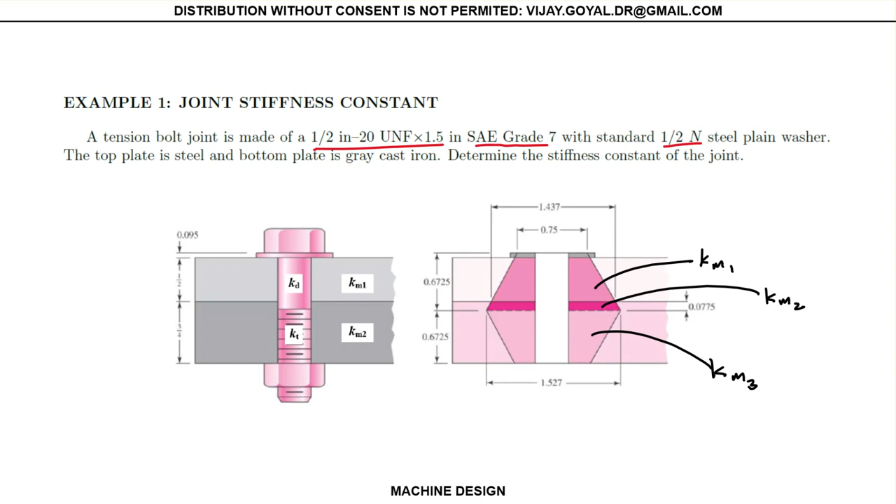With that said, let's move on to find the material properties. First, this is steel, and if you go to table A5, you can see carbon steel is given as 30 MSI, that's 30 times 10 to the 6 PSI. The gray cast iron is 14.5 MSI, so that's 14.5 times 10 to the 6 PSI. So these materials are given.

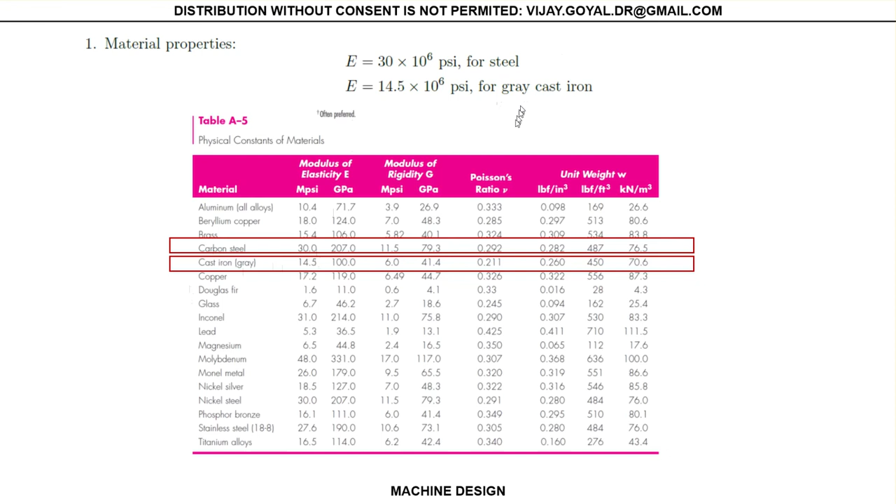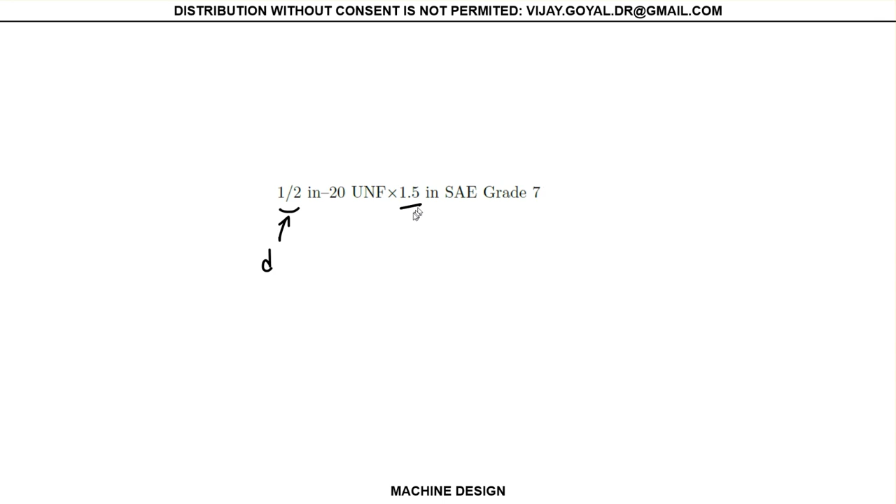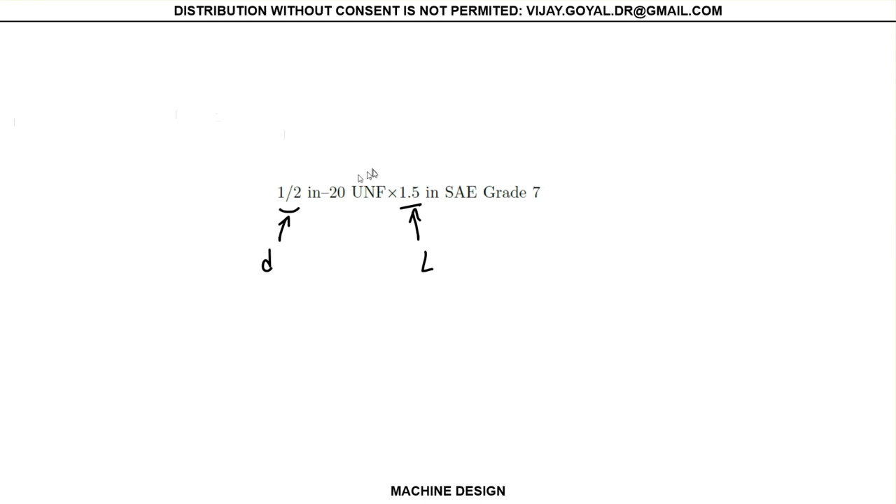The other thing is I have this, so this just tells you this is your diameter, this is the total length of your fastener, and the second number will come from this table. It's a unified series, and that will show you this is your N. If you wanted to find your pitch, remember your pitch is 1/N, and that's how you will do that.

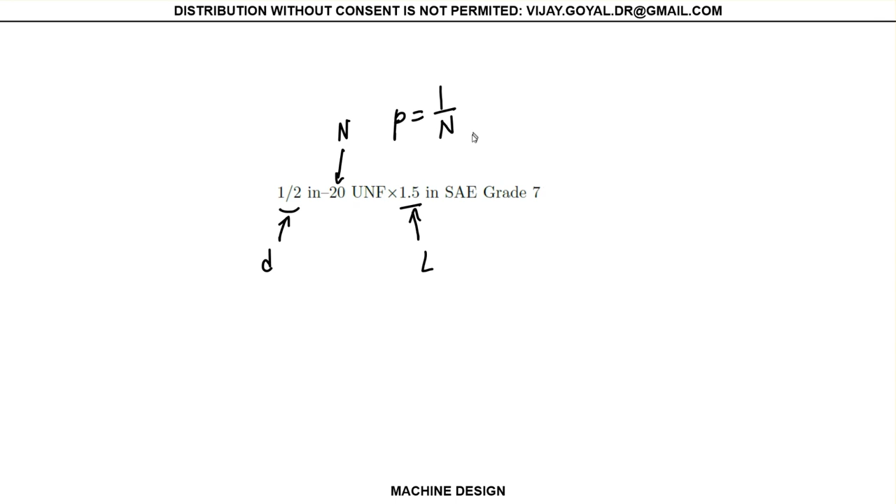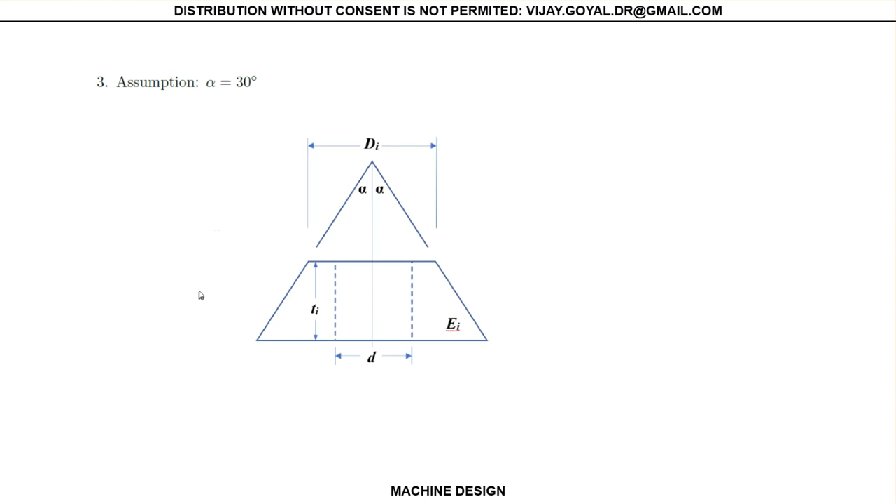The second thing I want to do is use the assumption of alpha equal to 30 degrees. That's how the frustum method works, unless something else is given. So this angle will be alpha equal to 30 on one side, this is alpha equal to 30 on this side. So the total angle here will be 2 times alpha equal to 60 degrees. That is the first assumption.

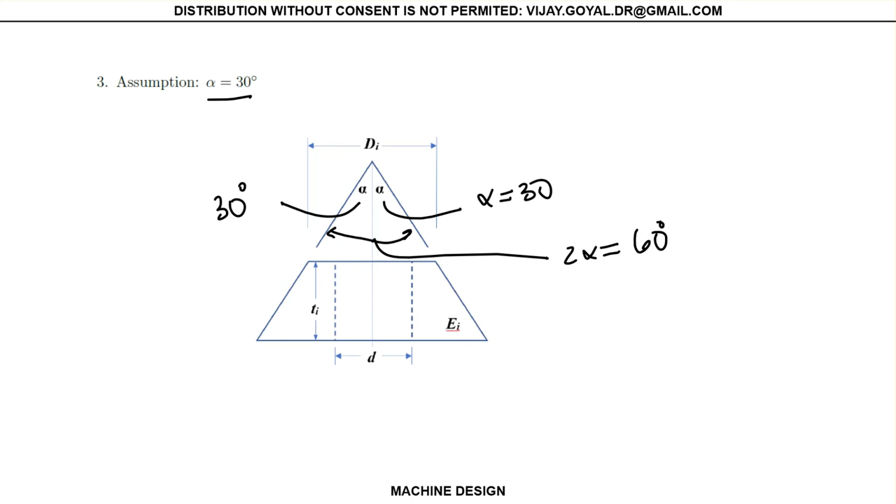So now I want to go ahead and find all these dimensions that I need in the problem. To find the dimensions, this is given in the problem right here, and that comes from the fact this is 1.5 inches. Another way to also find this, for your own knowledge, so you can at least know how we find this if it was not given: your total L will be this distance plus this distance, right?

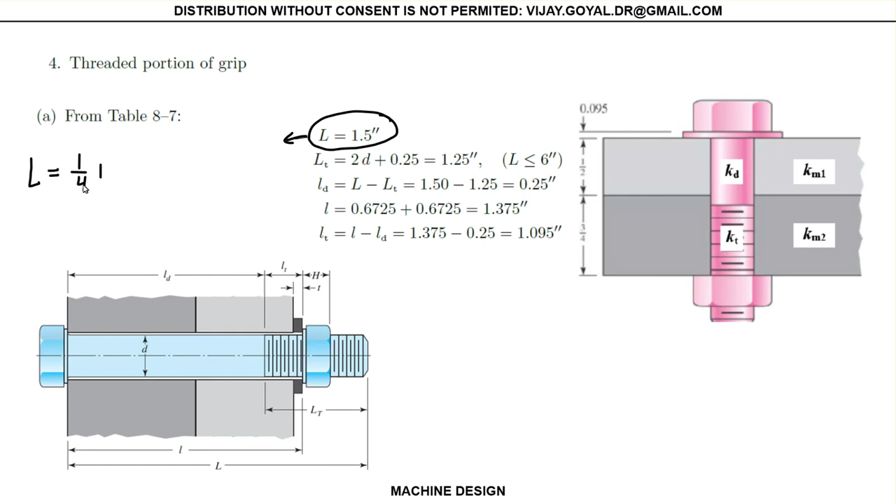This is 1/2, plus 3/4, plus your nut. Okay, your nut is 1/4, so this is nut plus clearance.

Okay, and that would give you a total of 1.5. And in nut and clearance, we like this to be twice this distance as well. So this is 1/8, and this will be also 1/8. This is just for your own information.

So where does this come from? This comes from table 8.7. Table 8.7 shared this with us, and you can see that this is 1.5 inches. So this is the case that I'm using here. That's why I say 2 times D plus 0.25. D was 0.5, so this gives you 1.25.

These are all definitions given from the table itself. LD will be L minus LT, that will give you 0.25. So this is the total distance from here to here. And LT is this distance, and that gives you 1.095. This is important, LD and LT, because I need to know what is the engaged threaded section, and what is the unthreaded portion, or the shank portion, to find the stiffness of my bolt.

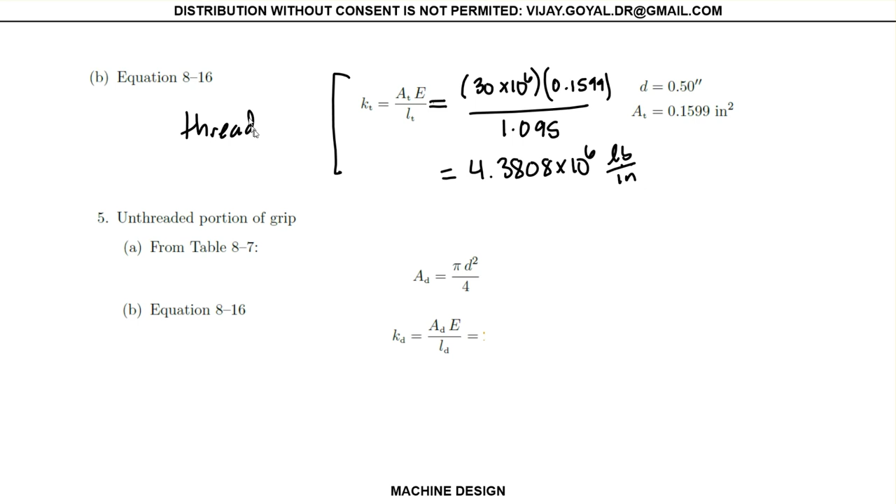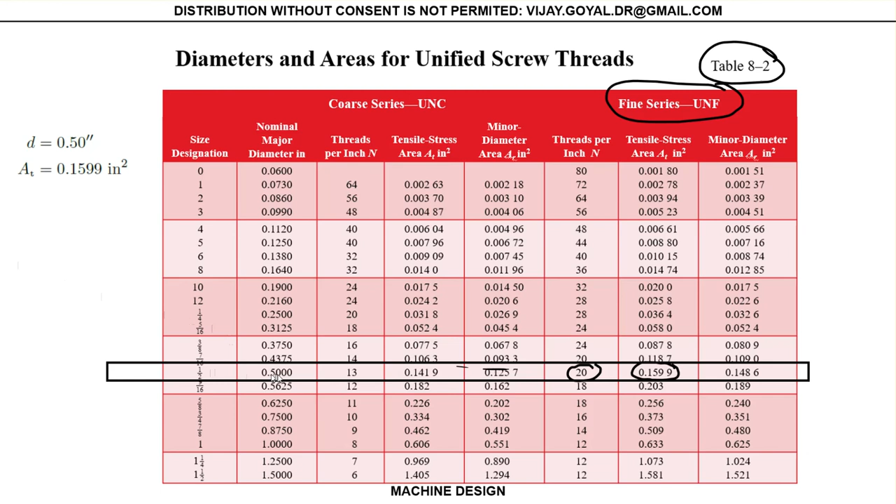Now we want to find the unthreaded portion, and the unthreaded portion is given by D. Remember, your D is equal to 0.5 inches. How do I know that? That comes from your table, it comes from here. I know this is 0.5, also comes from the table, is 0.5. So that's the value I'm using here. And this is also the same material, it's steel.

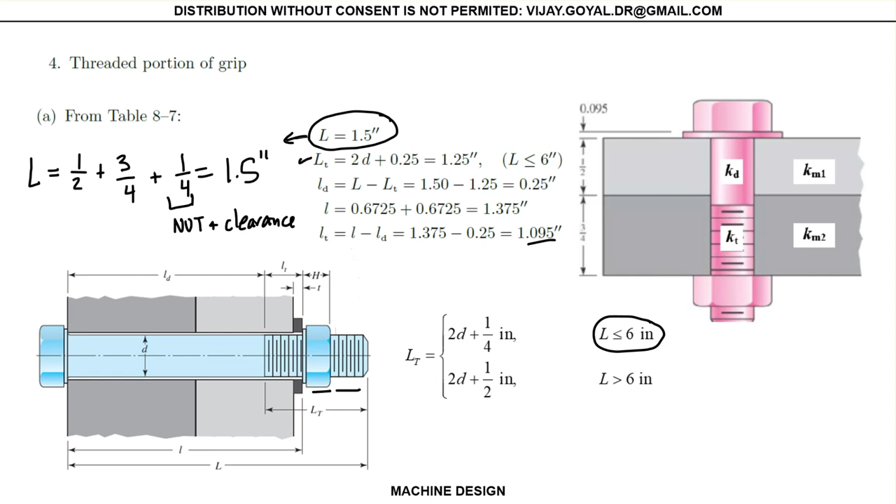So AD gives you pi times 0.5 inches squared divided by 4. That gives you 0.1963 inches squared. So this will be 0.1963 times 30 times 10 to the 6 divided by LD. Your LD was here, that gives you 0.25. Do the math, you will get this is 23.562 times 10 to the 6 pounds per inch.

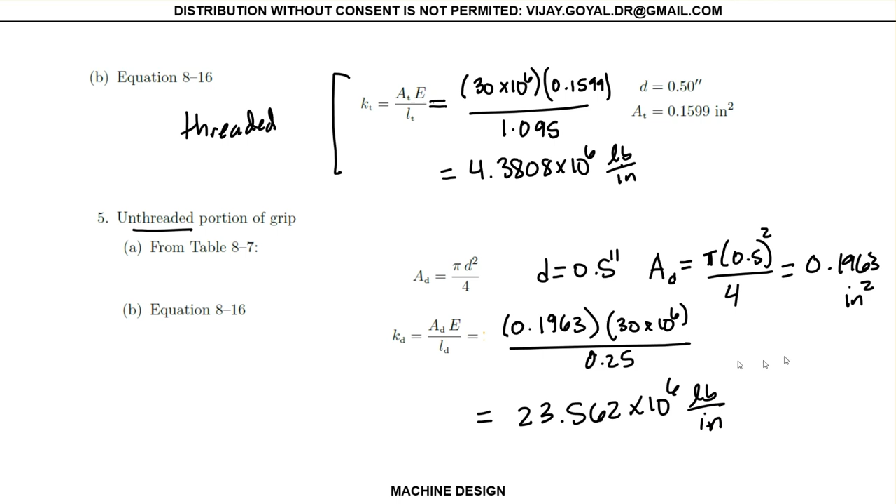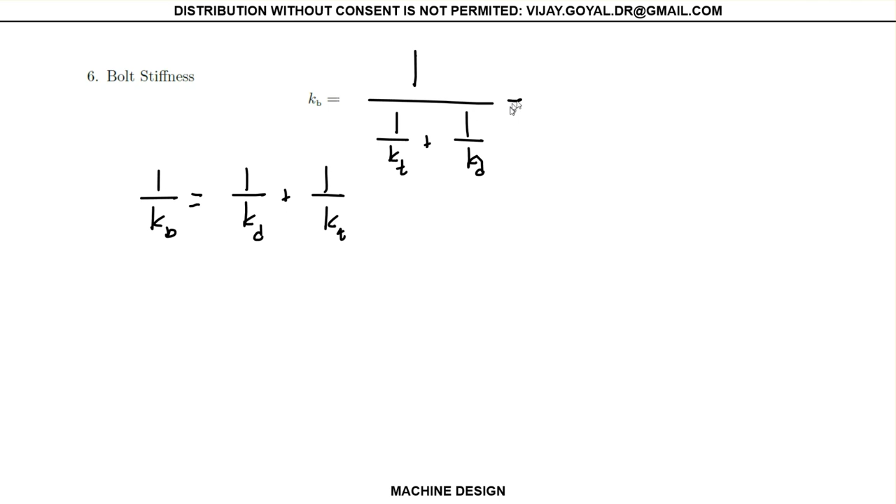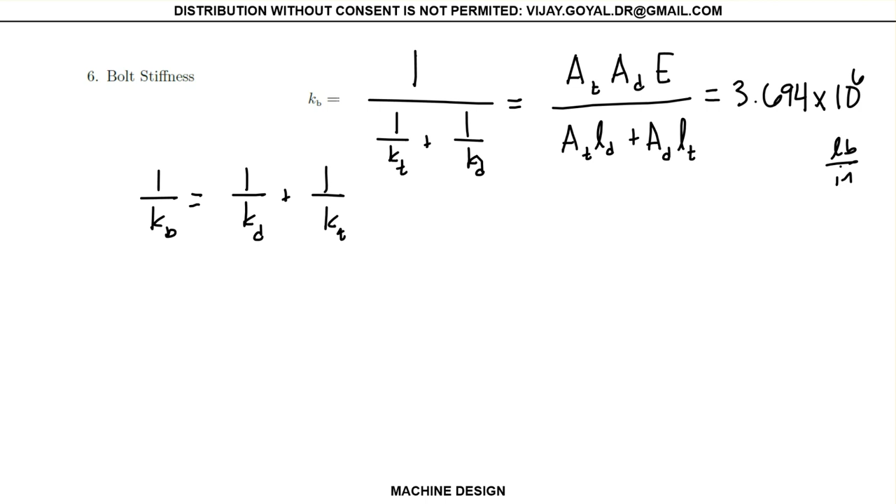Now I need to find my member stiffness. The member stiffness, as I told you, I'm going to divide this in three parts because the half of this portion is there. And again, I want to point this out. Let's suppose I had another washer at the bottom. In that case, this would be this distance over this distance divided by 2, okay? So if that was the case, you can see how this may be shifted even further down for this particular case. So those are different ways to do the problem. In many problems, we like to put washers at top and bottom. You saw that in the video because that helps improve the contact and the clamp force.

Okay, so going back to the problem, this is 1 over k, and again, this is hypothetical, not for this problem. So this is 1 over km1 plus 1 over km2 plus 1 over km3. So now I need to find each one of these, and then I will be able to solve this. The first case I want to do in this problem is the upper portion, which tells me that this is gray cast iron. So gray cast iron has 11.5.

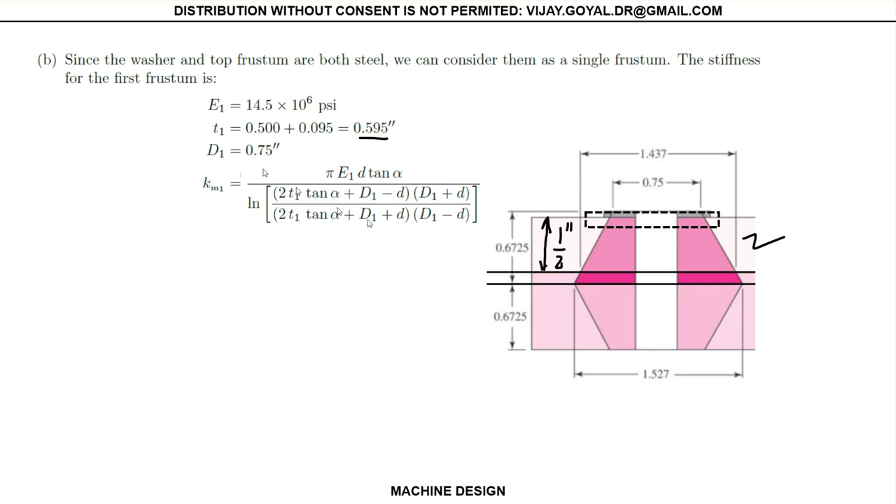This big D is not this diameter. This is your D. That's your small d, your bolt diameter 0.5, or a clearance diameter if you have some clearance. Let's suppose it's a tight fit, so we would keep it at 0.5 inches. And then your washer diameter is...

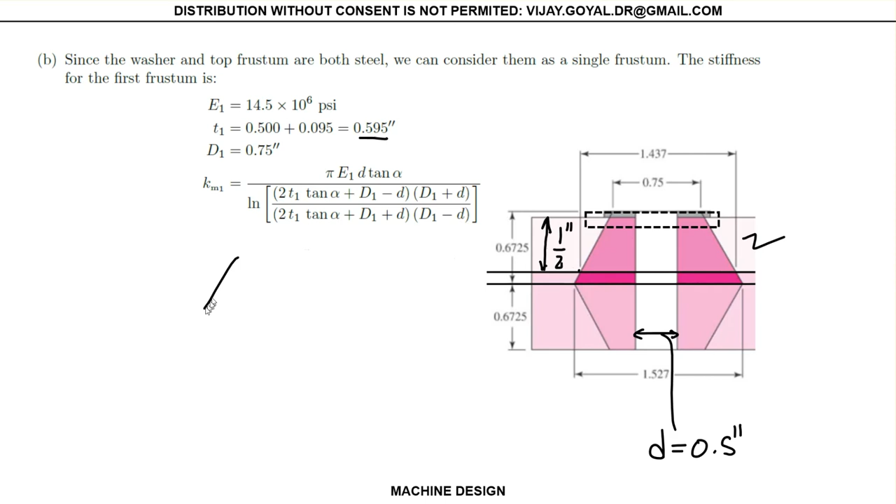0.75. And what you want to do is find the smallest distance between these 2 points. So if you would, the problem is actually something like this. And this is 0.75. This distance I do not know.

This is 1/2. This is the washer. We're going to assume that the contact here and the washer is the same. That's a good assumption. So I don't care about this distance, I'm going to use the smallest anyways.

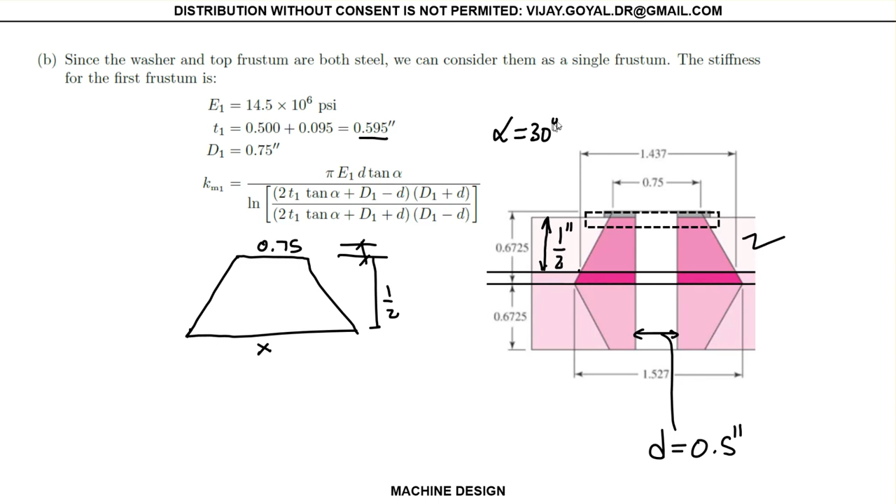And the T is given by this value, E is given by this, and alpha is equal to 30 degrees. So in this problem, km1 is equal to 1.0574 times 10 to the 7 pounds per inch.

Okay, now let's go to the small segment. When I do this small segment, first of all, this distance right here is geometry. You take all the dimensions, you know that this is 3/4, and you can do subtraction and find that this is the value you get.

And this is the same. But before we continue, we have to go one step back. This value should be 30, times 10 to the 6. So this value is going to change.

This will give you 3.080. And then this value right here, after you evaluate and plug in all these numbers, comes from geometry because you want to know this distance right here. And that distance is going to come from a little bit of geometry here.

This is 30 degrees, and you know the height here, so you know this value. You're working it here. This is what you're looking for, and you know this height, so you can do it this way. There are many ways to find this, but this is one of them.

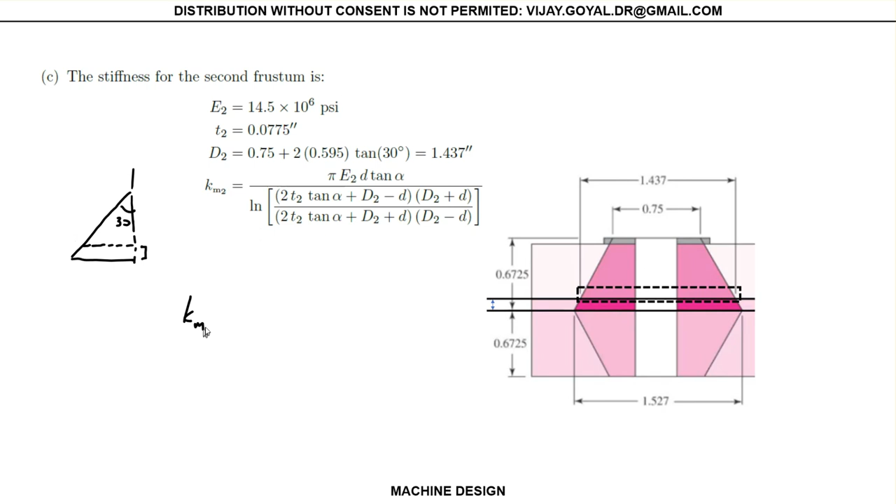So this is what gives you 1.437, and this is half of it, by the way. So the value that you get for this stiffness is 28.555 times 10 to the 7 pounds per inch, and then you continue.

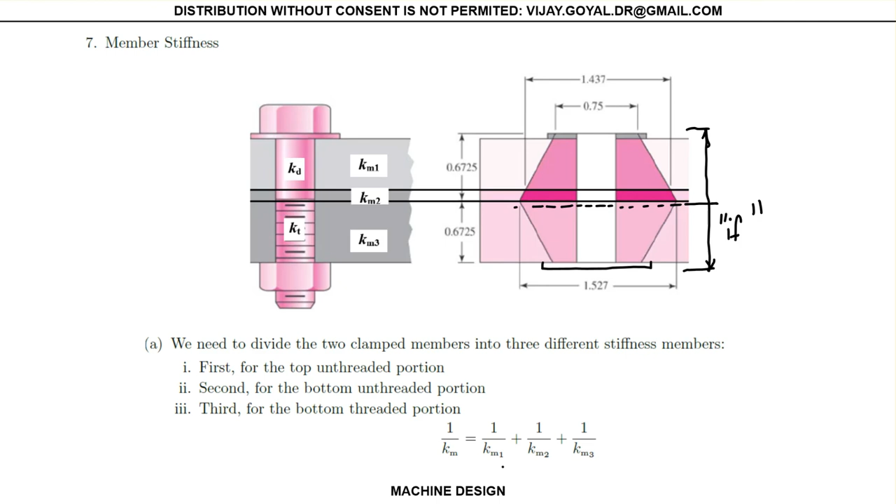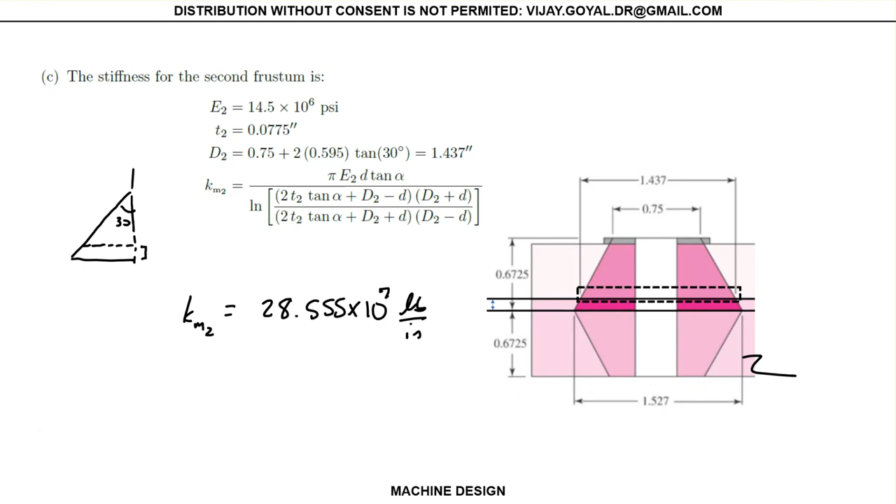This again is 14.5 because this is the same material. This material is steel, that was the mistake, it was supposed to be 30 because it's steel. This is gray cast iron, and this is gray cast iron.

And the value that you find here, the thickness from here to here is 0.6725, and then you would use the smallest, which will be the same value we began with, unless there's another washer. This will give you a value, if I plug in all these numbers, of 1.415 times 10 to the 7 pounds per inch.

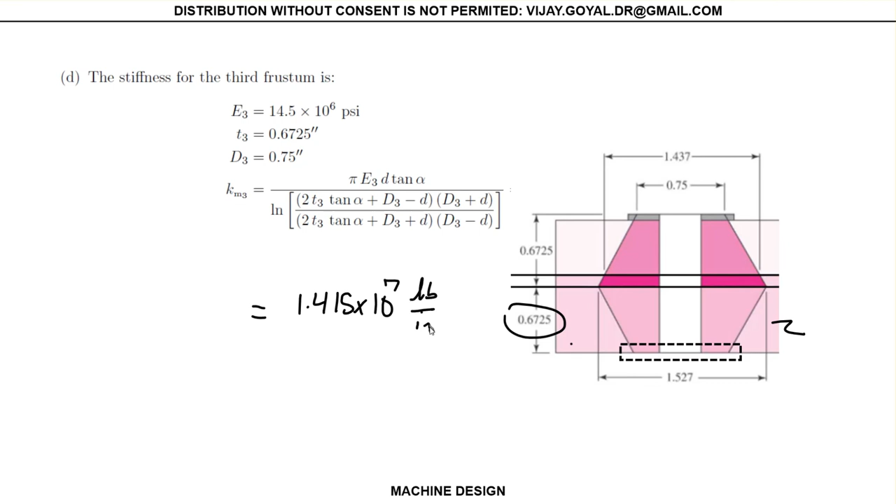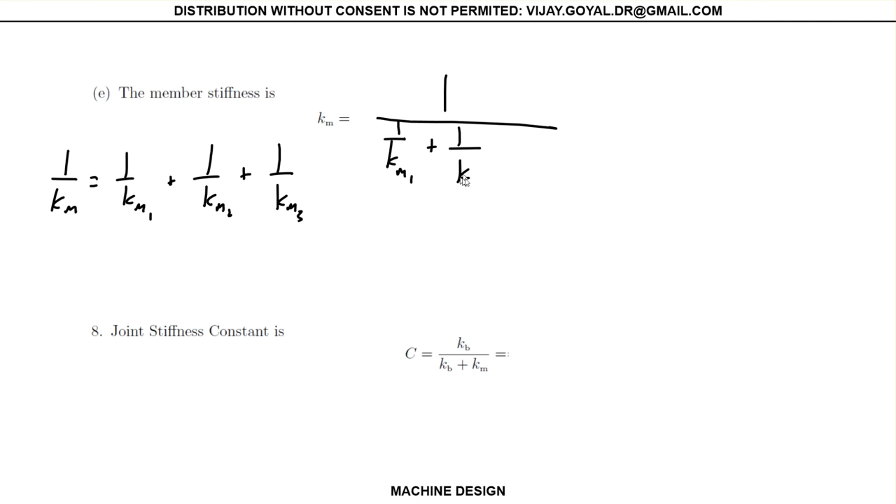So your total member stiffness, again just remember this is springs in series, so this is basically the summation of the inverse of all the springs, if you would. This becomes 1 over km1, the inverse of this, plus 1 over km2, plus 1 over km3, and this gives you 9.378 times 10 to the 6 pounds per inch.

And this gives you a total spring constant of, if you replace the values in here, you get 0.2826. So this is the value we are looking for, the joint stiffness constant. You can see the value is bigger than 0 and less than 1, so it is acceptable.

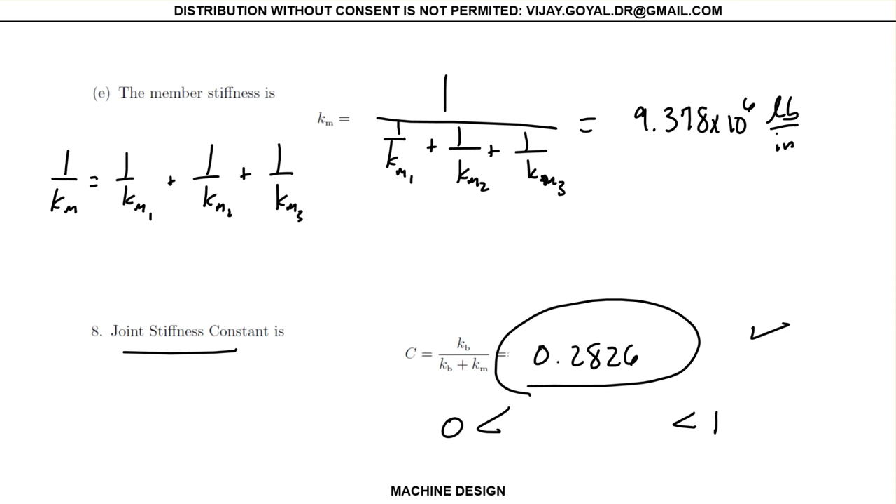So this completes example number 1 on fastener joint stiffness.